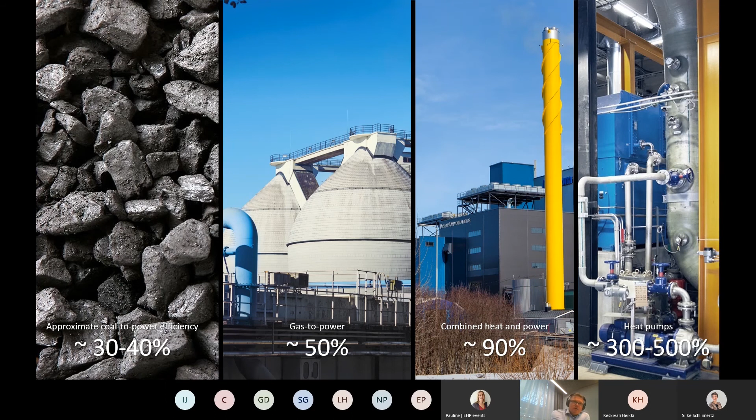So where are we targeting? Electricity-based heat production - that really makes sense.

How does this work now? More than 50% of the EU's final energy consumption is heating. And how we are today producing the heat, or power in general - I have to say, before somebody with a very technical background points out that we're not comparing apples to apples, that's correct, this is a little bit illustrative in that way.

But anyway, if you compare the efficiencies of different technologies: efficiency in coal is around 30 to 40%, gas to power goes close to 50%, combined heat and power close to 90%, which is normal practice in the Nordics these days for heating networks. And when we talk about heat pumps, which naturally produce by utilizing electricity, we're talking about efficiency in the range of 300-500%, depending on several factors like the temperature or the heat being pumped.

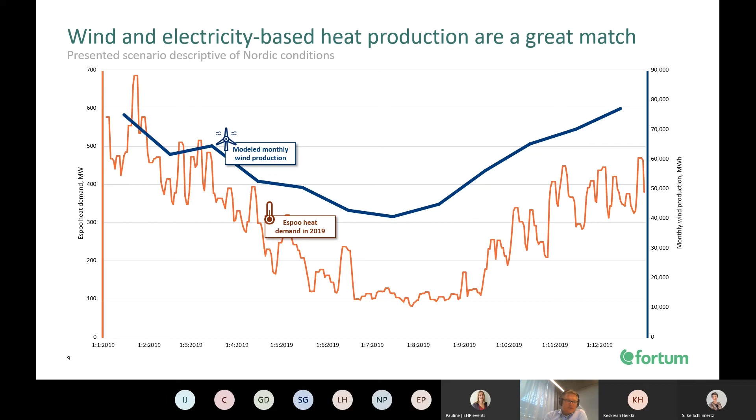Traditionally we've been quite manual in our operations, and at the moment we're increasing the level of automation, taking our new production facilities to remote operation mode so we don't employ operational staff at the site. Instead, we have our operations in one central location, which also houses all our market operations. So once we're utilizing gas, producing electricity, selling it, or optimizing heat distribution to the customer end, that's all done from the same physical location, not power plant by power plant.

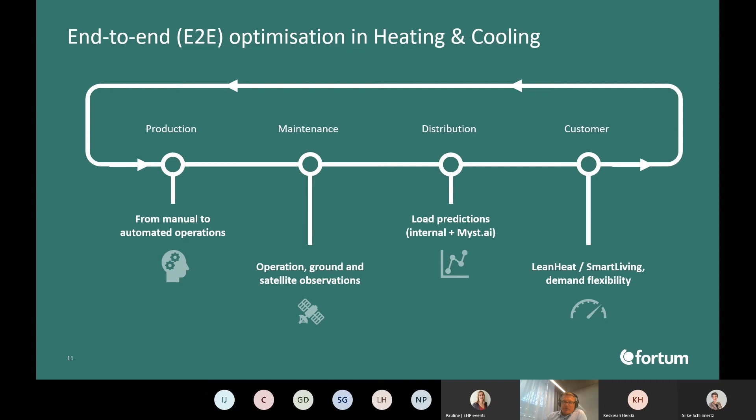On the customer end, all the time more measures are taken, sensors are installed. We have been establishing new solutions to manage the environment inside houses and offices, so that we have also been able to make new types of products and services, like demand flexibility, so we can utilize their capacity. I have only a few slides left, so I will let Heikki talk more.

But you might wonder why I have this kind of nice picture from space. That's connected to some of our latest innovations.

Timo, you might need to take control again. Okay, what can you see because of the disconnection? What can you see at the moment? Now we can see the space. Okay, thanks.

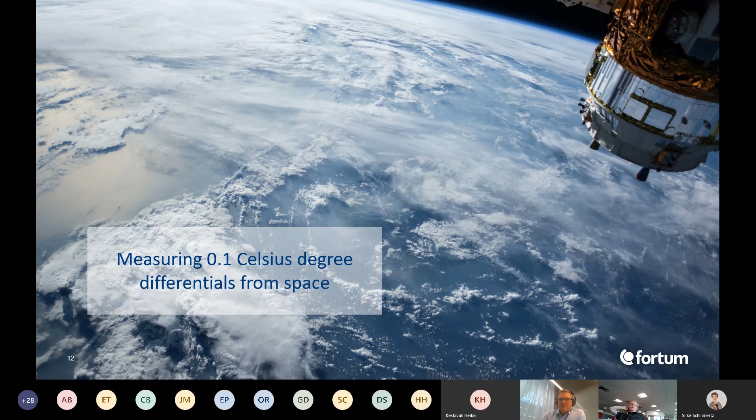So what I was saying, you might wonder why I have this nice picture from space, but that relates to our new innovation. We are measuring 0.1 Celsius degree differentials from space to identify leaks in our system. This is the network map in some part of Espoo city, you can see the district heating pipes. From these satellite pictures we see if there are leaks in the heat network, and if you have a leak that means you have to add replacement water and you are losing some energy as well. So we are improving our network with this.

Traditionally this was done by people on the ground, then in recent years it has been done from helicopters by taking photography from there. But now we are a bit further away, taking this from space.

So then a few words about Espoo city so that you can put everything in scale. Excuse me, can I ask one question?

Oh yes, please. To the previous slide, can you balance out these unbalances? Like theoretically, can you balance them out using something like borehole thermal energy storages?

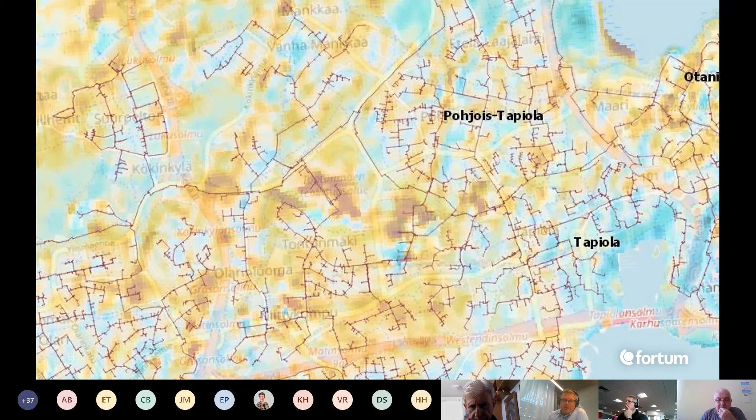But seasonal storage would normally mean, for example, geothermal drilling or something similar. It really requires a lot of space and deep heat systems, but Heikki is going to talk more about that. We also have a geothermal project ongoing, a very interesting one, I think the first in the world at this scale, where we are drilling down to 6.4 kilometers. It doesn't require any heat pump, anything - it's just direct geothermal utilization. So I hope that somehow answered your question, and let's talk more in the Q&A.

A few words about Espoo so that you can put our story in perspective. Espoo is the second largest city in Finland, and here you can see the construction site of one roughly 50 to 60 megawatt heat unit, which is running on biomass. And there is on the same site also some pellet production, around 80 megawatts. So Espoo is already now awarded as the most sustainable city in Europe.

I was muted for a while, but let's hope that you hear me again.

So some 280,000 residents are living in Espoo. Espoo has a clear target from the city side. They aim to be carbon neutral by 2030. And today, district heating accounts for over 50% of the city's CO2 emissions. So we are a massive emitter in Espoo at the moment, and that's why it really makes a difference in the city, partly also on a national level, when we are exiting coal by 2025 at the latest.

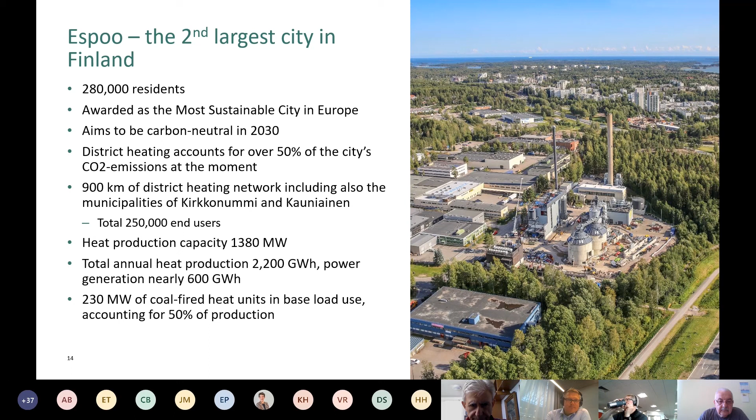And here you can see how the amount of carbon neutral district heating in Espoo is developing. So we started this journey already a few years back. In 2014, we were practically only CO2 emitting in production. Two years back, 26% after installing the first heat pumps. Today, already, we are 40% CO2 neutral as we have implemented some new capacities.

Next year, more heat pumps are coming online, and also the geothermal deep heat system starts to operate, and we are already at the 50% level. And when the remaining one big coal-fired CHP is going to be decommissioned, then 85% CO2 neutral production, and by the end of the decade, we are at 95 to 100% CO2 neutral. That's where we are going, and now it's time for Heikki to talk a little bit about the projects.

Heikki, please. Very good. Thank you, Timo, and a fantastic day also on my behalf. So Heikki Keskiväli is the name. We're not in the very beginning due to maybe some technical difficulties. Hopefully those are now behind us. And I am responsible for the strategic projects in our business unit of Heating and Cooling Finland. There's only a few minutes of presentation time left, but hopefully it is okay to use up some of the Q&A time for that, as we have still 17 more minutes to go. So I will be now walking through our concrete activities project by project, and please feel free to ask questions at any point in time.

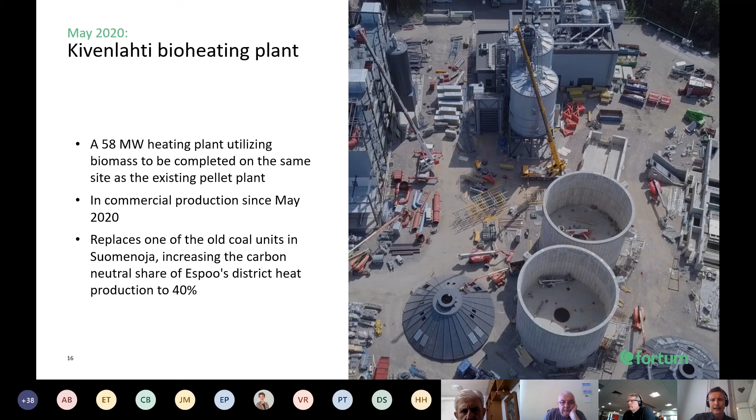So we start with the Kivenlahti bioheating plant. It was actually just commissioned in May this year, and at the same time we are now closing one of our coal units, the Suomenoja 3 coal heat boiler here in Espoo. So from coal we changed to biofuels, carbon neutral production, roughly 58, so roughly 60 megawatts of heat production. So that's basically what has already happened.

Then moving forward, we are in an exciting partnership with another energy company, ST1, and just like Timo mentioned in his good introduction, this is a very unique project, one of the first in the world at this depth. And basically we are committed to buying all the heat output that we get from this project. It can produce up to 40 megawatts of renewable heat from the heat in the ground, but it's roughly 20 to 40 megawatts of project output when it is commissioned, expected early next year.

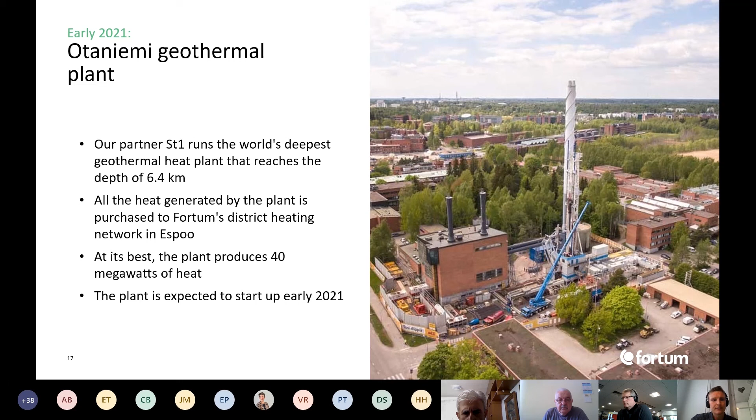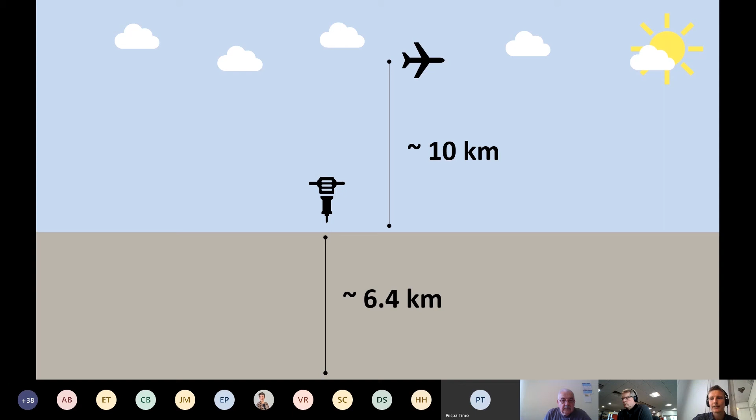And just to put this into context, it's easy to say how many kilometers deep it is, but let's take a look at it in context. So here we have a beautiful drawing of the ground, and then where we are used to flying, when flying was still our normal way of living and doing business. That height is of course roughly 10 kilometers. So it's quite fantastic that we are going the same magnitude down into the crust of the Earth. Of course, not using a drill like that, but still, just to give you a little bit of context of what kind of magnitudes we are talking about with this project. It's quite impressive, and we are very much looking forward to the actual results.

In addition to geothermal, we also have a third heat pump unit in Suomenoja being built. It's 20 megawatts in addition to the previous 40 megawatts that we already have, and it's utilizing both seawater but also wastewater as a continuous stream of heat, waste heat that can then be primed with heat pumps to a sufficient temperature that can then be used in our district heating network.

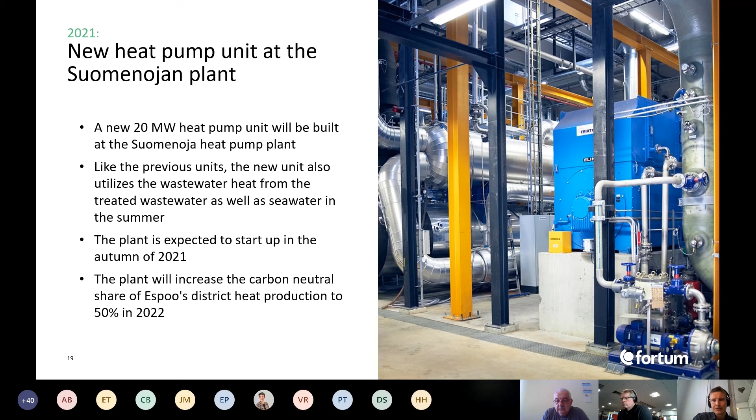And the commissioning is expected next year, and this will now take us beyond 50% in carbon neutral share. So very exciting development also on this front.

Next, very quickly, we are addressing a few projects that are not yet in the investment decision phase, but they are running towards that. One is a large-scale portfolio of air-to-water heat pumps, also known as AWHP. So up to 150 megawatts of distributed heat generation across the city. It would be built out in phases, and the first projects are already in the pipeline.

Of course, this is new technology, especially at the scale that we're talking about. So it's very dependent on the eventual technology expenses, how the pilots go and so forth, but also how the taxation in the country is developing. So all these things will have an impact on how big we'll eventually realize. But this is very exciting development and distributed in its nature.

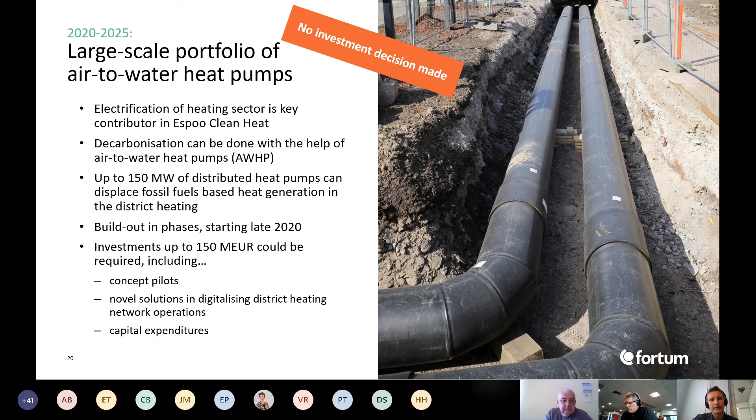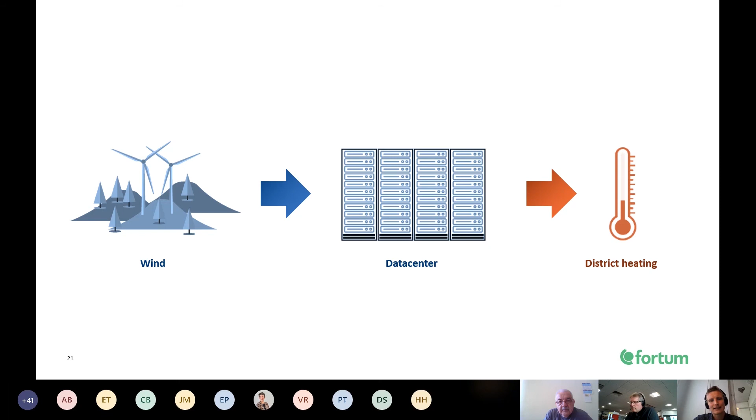Then this is maybe something that I truly love, this concept. So let's take wind power. It's the cheapest source of new build electricity in Finland. You put that into a data center, and that data center then generates excess heat that can be put into the district heating network, thus replacing coal. I think this is quite a fantastic narrative, one of the best one can have in this business. So that's exactly what we are developing also.

So 100 megawatts of wind-powered data center could provide roughly 1/3 of our district heating demand without any CO2 emissions. So of course this is dependent on the interest of data center operators, how the tax treatment of heat pumps connected to district heating is evolving, and how the Finnish industry electricity tax is changing.

We are hearing and seeing positive development on these fronts, but certainly regulators need to move in order to make things like this reality. And we're talking about several billion euros in the greatest extent if these were to realize. So a very big opportunity, not only for the Nordics, but also Finland, and especially Espoo and Kirkkonummi.

Then we have an exciting project on the industrial waste heat, process heat side. There's a big industrial area called Kilpilahti, roughly 40 kilometers east from the capital area of Finland. There we have a consortium of multiple companies, Neste, Helen, Fortum, Borealis and Keravan Energia. And we are studying the possibility of bringing waste heat from these heavy industrial processes to the capital region.

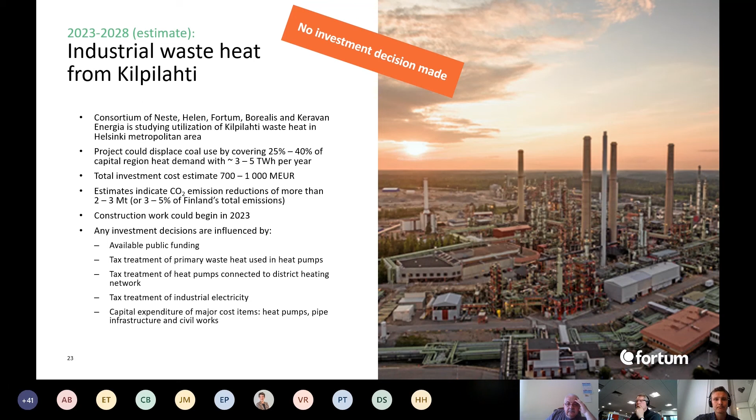So we started with a riddle. What is common for these four? Netflix, plastic bag, outdoor air, and toilet. And now it's prime time to reveal the answer. So basically, as we have just heard, these are all potential energy sources. Netflix, of course, relates to data centers. That's heat we can use.

Plastic bags, that is one of the industrial processes related to plastics in Kilpilahti, also a potential energy source. Then we have outdoor air; the air-to-water heat pumps, of course, relate to that. And then finally, we have toilets, so basically sewage water. That is also something that we are using for energy production. So very exciting stuff. And along the way, we are reducing not only costs but also emissions. So very exciting development.

So that brings me to the final point of the presentation. If we look at the global energy consumption provided by IEA, the authority in the business, we can see the primary energy consumption in terms of terawatt hours. We can see how much is that, and then we can see what is the waste heat, how much there is waste in that primary energy consumption. And then we end up with the final energy consumption, the amount of energy that we actually end up using. This waste heat, 50,000 terawatt hours alone, is more than we use globally for electricity. It's actually more than double.

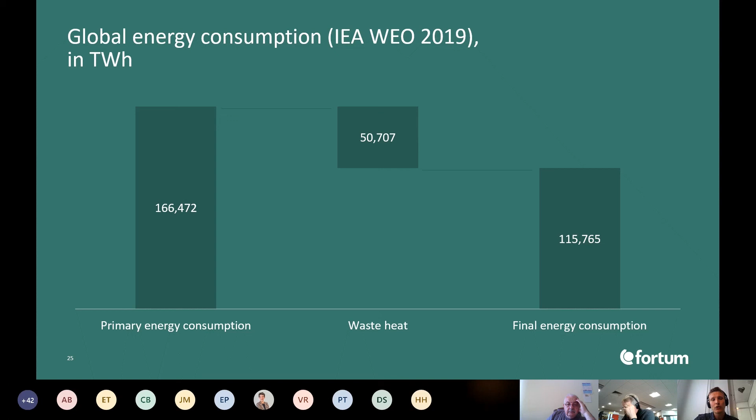And the key here is that district heating is the only scalable way to actually make use of these low value energy sources. So that's very good to keep in mind, whether you are an expert in the business, you work with regulators, or you are a regulator or politician yourself. This is something that is truly important to understand and reflect. And we have seen many examples of that during this presentation.

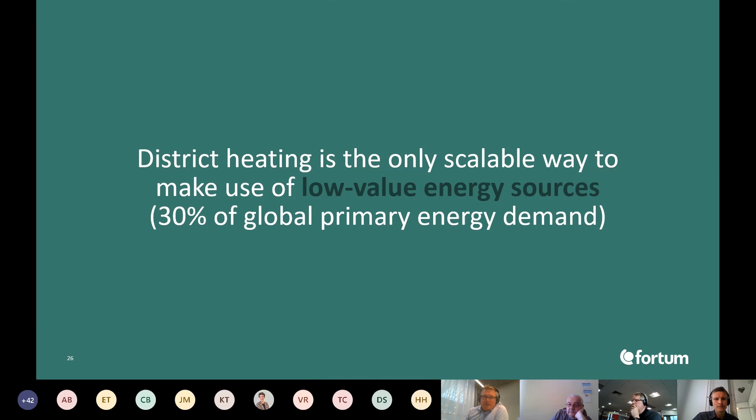And what comes to the sustainability of the biomass itself and bio in heating, as you can see, we are more developing the non-burning solutions, meaning that biomass for us is a kind of temporary solution to go to carbon neutral. And in our new investment plans, which you see in this strategy illustration, there are no new biomass plants in our plan. So there is one multi-fuel plant with a question mark at the very end of this decade, but the aim is not to develop that one, but more to develop these geothermal heat solutions, heat pumps, and excess heat utilization based on industrial excess heat or data centers.

So biomass will have its time, but it's not going to be there for heat production more than needed. It's a little bit like coal. It will have an ending date, I would say. Yeah, very good. Thank you, Timo.

And to continue with a few of the questions, there were questions about the CO2 emissions of the heat pumps, and basically we have given a lot of thought to that. And there is the benefit of contracting long-term renewable PPAs. Like mentioned in the beginning, wind power is the cheapest source of new build electricity in Finland, and there is a need to contract the electricity needed for the long term. And certainly one might argue that wind is intermittent. That is, of course, a correct observation, but we also have the benefit of owning a massive portfolio of hydro, of course renewable as well.